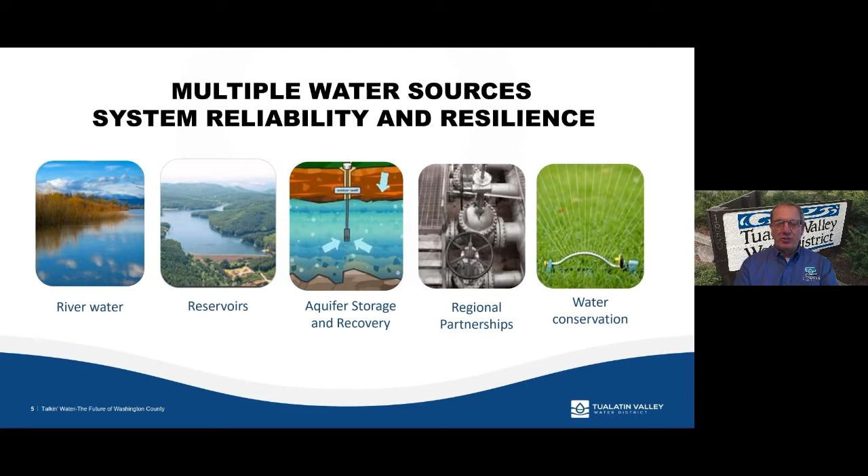So we do have risks that threaten our supply. Earthquakes are actually one of the major reasons why we embarked on the Willamette Water Supply Project. This is going to be seismically resilient as a main source, so that in a Cascadia subduction event, we should be able to continue to provide water after that event occurs. But it still remains a risk, and we make necessary investments to try to mitigate that risk.

Drought, certainly up until a week ago, we were facing some pretty tough situations in terms of drought. We had a tough year and didn't get a lot of rainfall, and we certainly had to stretch our resources to make it through the summer. It's always welcome to get the fall rains here and hopefully see more rainfall in the future to fill those reservoirs back up. But that's something we don't have a lot of control over.

So climate change. We are seeing changes in terms of the precipitation, the amounts we get, and when we get it. That makes it a little more challenging, and certainly is a risk to future supply. So we again are looking to diversify our sources and our portfolio of supply so that we can try to mitigate the risks of climate change.

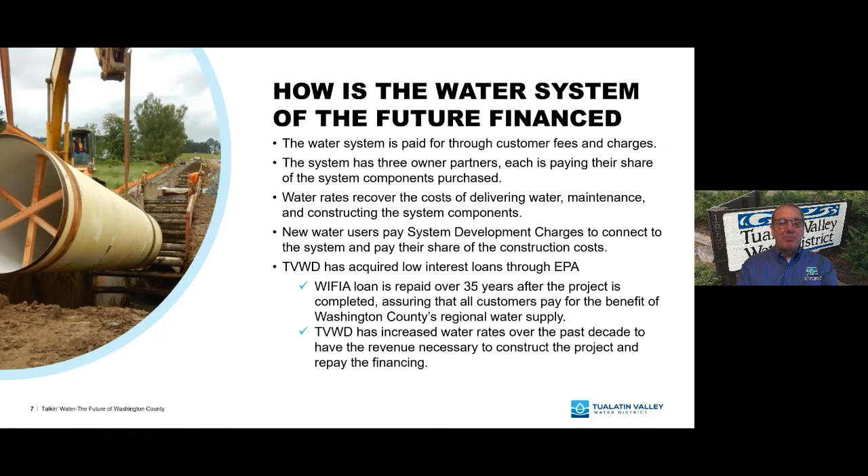So you understand what the costs are, but most importantly, you want to understand, well, what are we doing to manage these costs? The expectation is we manage these costs so that we make sure the impact is as small as it can be to all of you.

We reduced, in this biennium budget that was recently adopted, our personnel services by 2.8%. That may not sound like a lot, but we actually run a fairly lean organization, so that is not something that comes easily. It puts a great deal of workload on fewer people, but we realized we had to do all we could, so we looked at delaying hiring certain positions, or actually not hiring at all for some positions.

We've deferred $50 million of infrastructure projects. This was something we worked with our partners on, a big deal for all of us to make a very tough decision to defer some investment in certain aspects of the Willamette project to make this a little more affordable, spreading those costs out over a longer period of time so that we can reduce the rate impact to all of you.

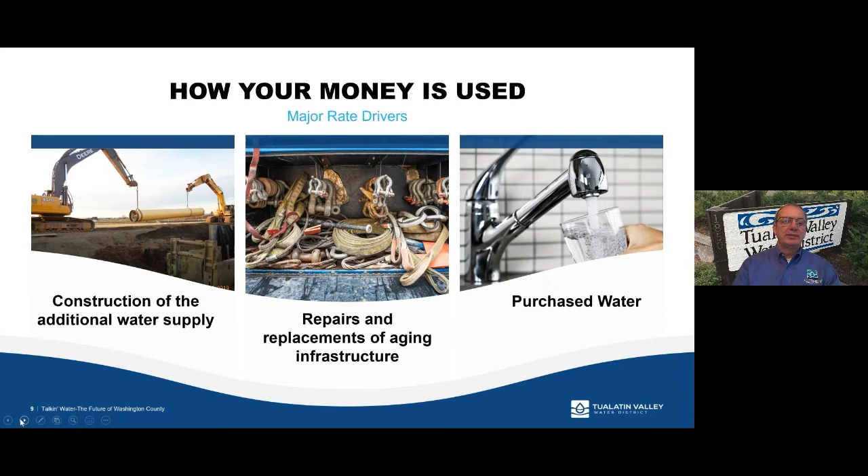Partnerships result in better investments, and one of the partners we work with is even those that aren't necessarily directly involved in this project. We partnered with Wilsonville and the Department of Transportation on the Kinsman Road project to make sure that, regardless of how you're paying for this, we're using your money wisely, which we take very seriously. So where we can partner even with other entities, we basically share the costs on the project in terms of a roadway or those kinds of things.

So we do multiple upgrades with one project. We did this again with Washington County, and we'll be doing it again in the future. We did it on the 124th Avenue partnership, and certainly on the South Hillsboro area pipeline. We coordinated with Newland to try to make sure we were working around what they wanted to achieve, lessening the impact to them and to us at the same time, and again sharing the costs where we can.

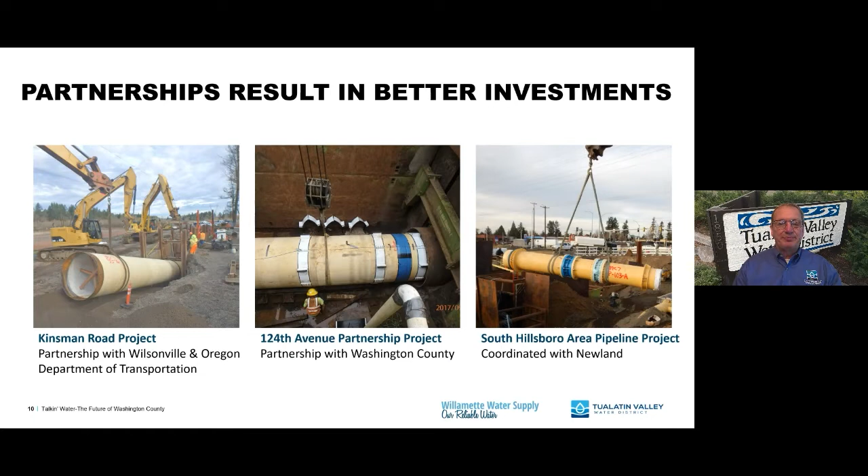So I believe at this point I'm turning this over to, or I will be turning it over to Dave. I'm not sure if I do that at this point.

Next slide. All right, yes, that's the one I was looking for.

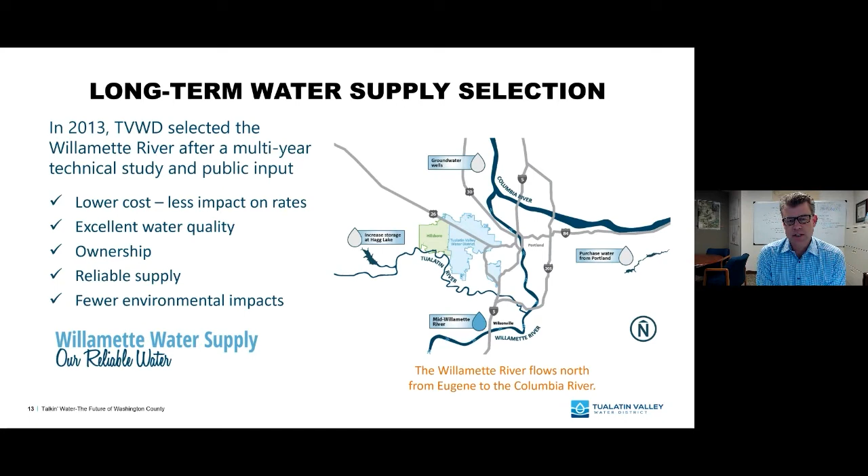And as Tom presented, there are 3 partners in this project: the Tualatin Valley Water District, City of Hillsboro, and City of Beaverton. So next slide is about what is the Willamette Water Supply System.

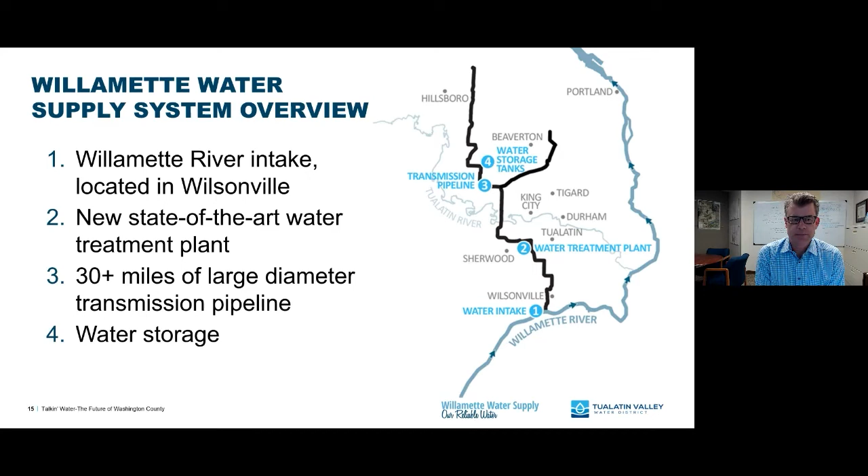So with that broad overview of the overall system, I've got a few slides here to show you, to give you a little bit more of a realistic, tangible perspective on what each of these elements looks like.

First off is the modified expanded intake co-located with the Willamette River Water Treatment Plant. If you go down to Wilsonville and to the water treatment plant park there—not right now, we're doing a lot of construction, but in a little while we'll reopen the park—all the way down toward the Willamette River is the raw water intake that will be shared not only by the Willamette River Water Treatment Plant, but also by our system. So we'll have a single intake supporting both the Willamette River Water Treatment Plant that serves the cities of Wilsonville and Sherwood, and the Willamette Water Supply System that will be providing water ultimately in 2026 to TVWD, Hillsboro, and Beaverton. So that's our intake on the Willamette River.

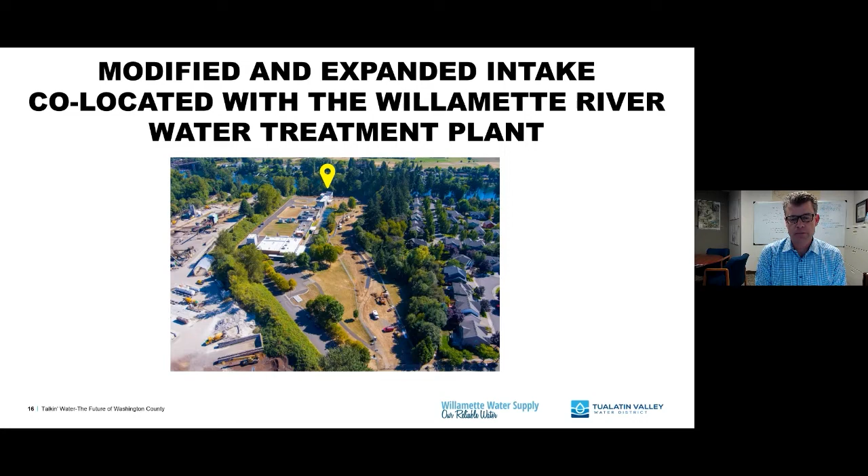Let's go to the next slide.

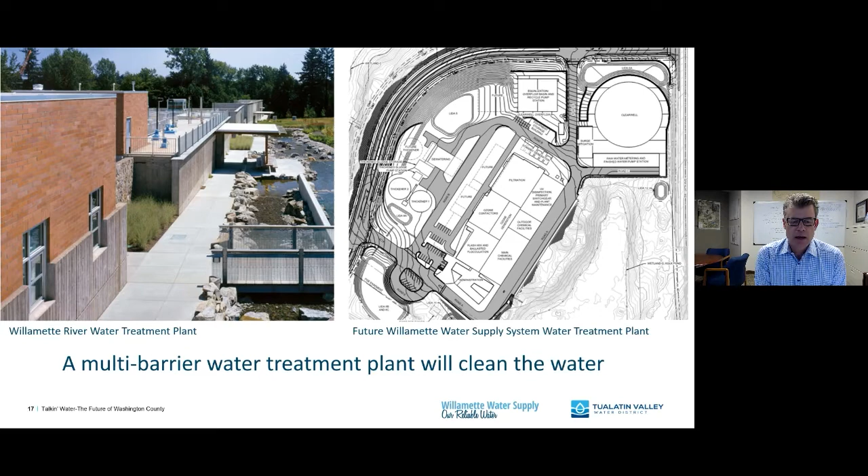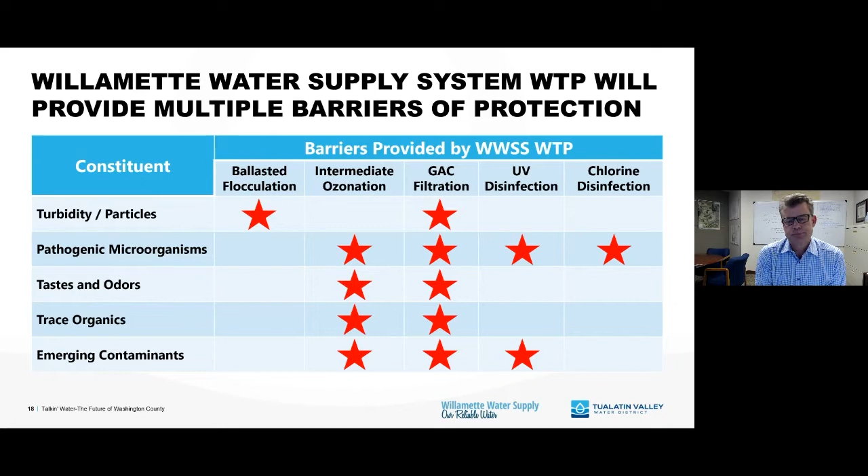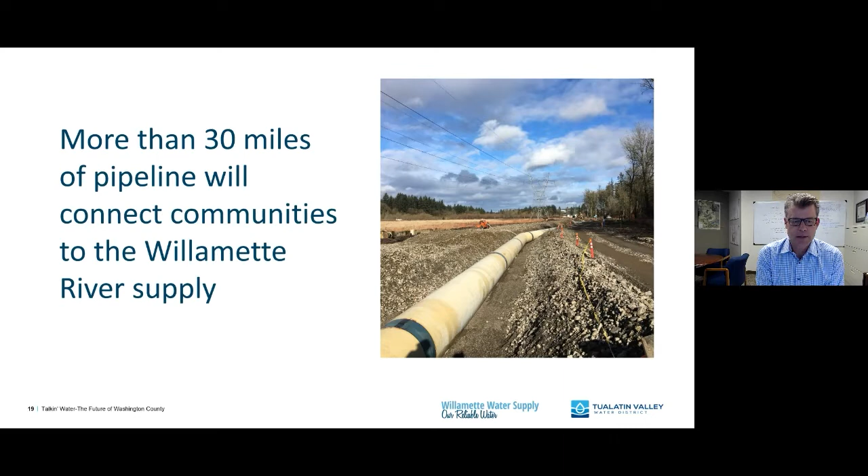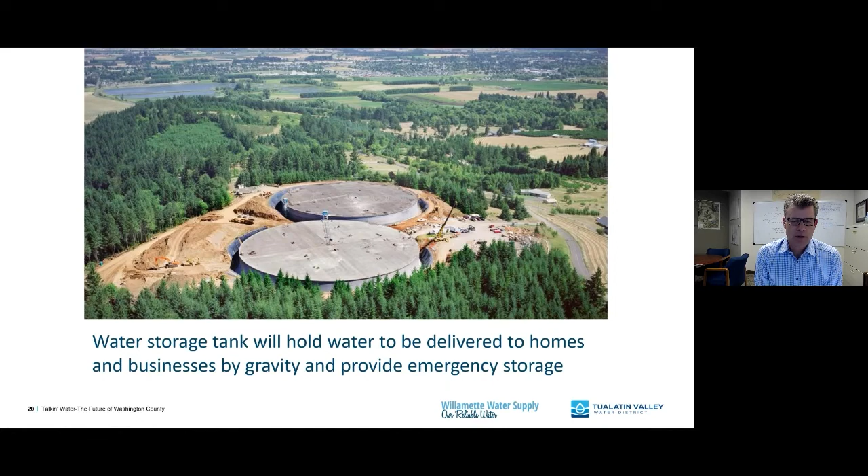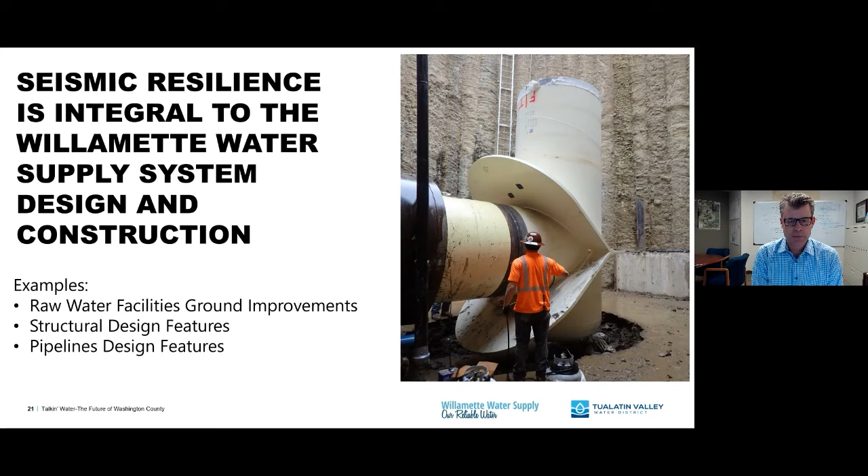Our geotechnical analysis and modeling showed this as a significant risk, particularly during a future Cascadia subduction zone event. It's likely that a lot of the riverbank along the Willamette River will want to move toward the river. If that occurred, it would take our intake with it and we'd be out of water. So we spent quite a bit of time, energy, and money to stiffen and strengthen the riverbank and ensure a reliable intake facility.

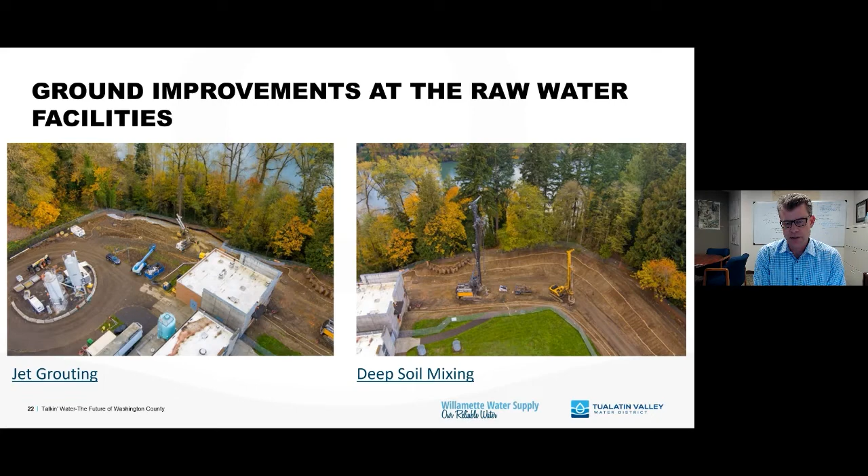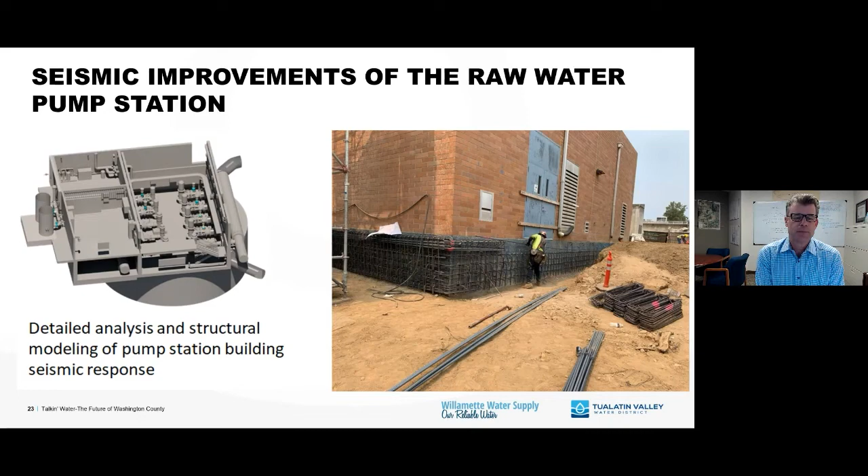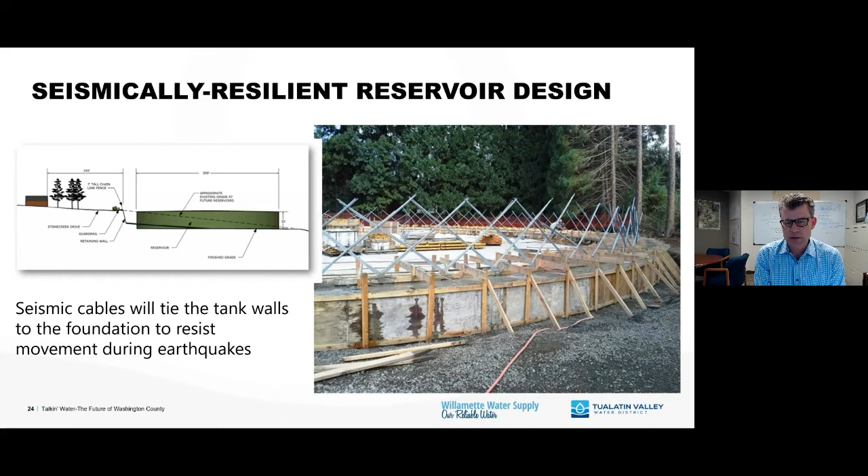Our reservoirs, in the center of our overall transmission system, are critical facilities as well. One design feature of these tanks are seismic cables. As you see them in a crisscross pattern here, these cables anchor the wall down to the foundation so that even during a sloshing event during an earthquake, they don't displace and the tank stays whole.

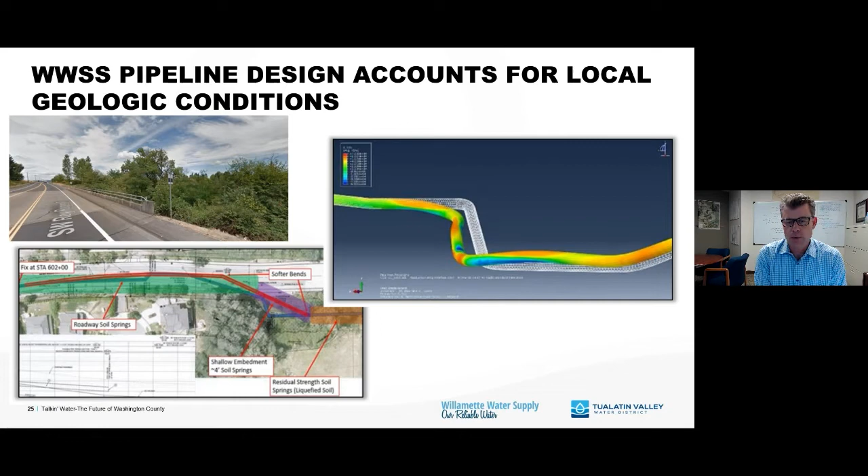We're expecting a lot of land movement there during a major earthquake. Unlike the riverbank at the raw water facility, where we're improving the soil to hold that facility in place, we can't do that everywhere—it would be economically prohibitive. So in some cases, we design our pipeline to accommodate anticipated land movement. It's okay if the pipeline moves, as long as it can hold pressure and remain in operation following such an event. That's what we're showing in this modeling—it gives us the information to ensure the pipeline is strong enough to withstand such an event and continue flowing water afterward.

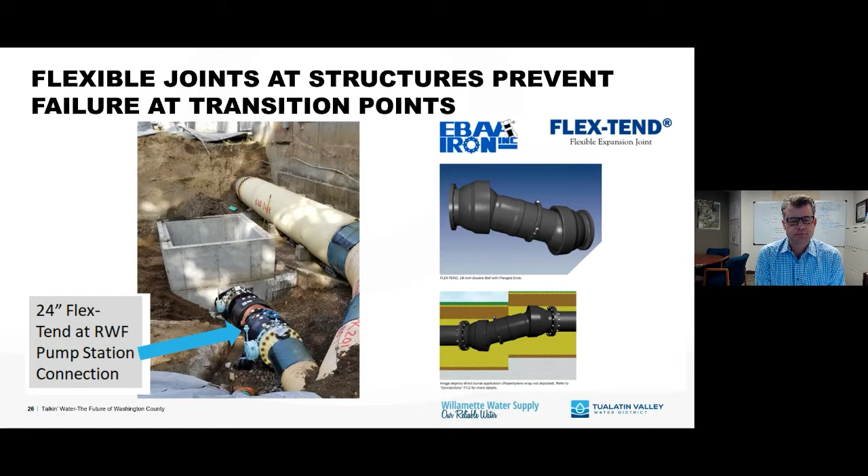Next slide. The program's been in operation for about 6 years now, so this is a very high level version of what we've completed. We've completed 7 pipeline projects. We secured WIFIA loans, we've received our federal permit and approval of our thermal trading plan, and we've continued successful partnerships internally with TVWD, Beaverton, and Hillsboro, as well as many other governmental agencies. We are on track for on-time completion in 2026.

Looking ahead, and actually right now, more than 500 million of construction projects will be sent to bid in the next 6 months. Very busy time for us. I think I've got one more slide.

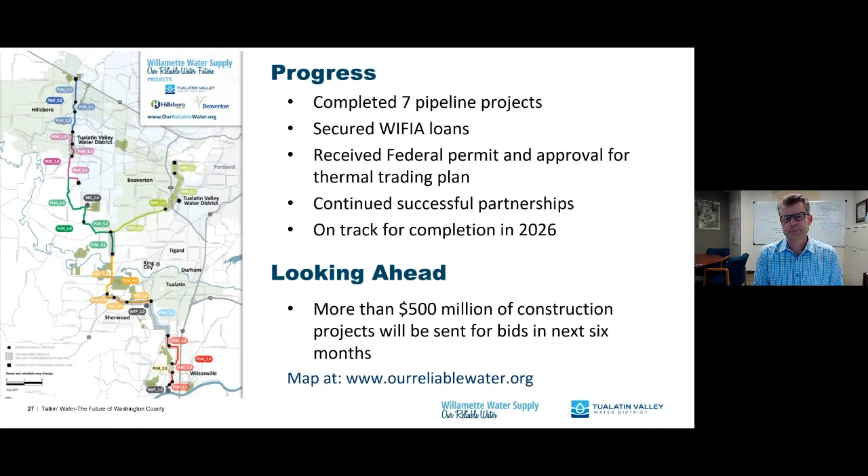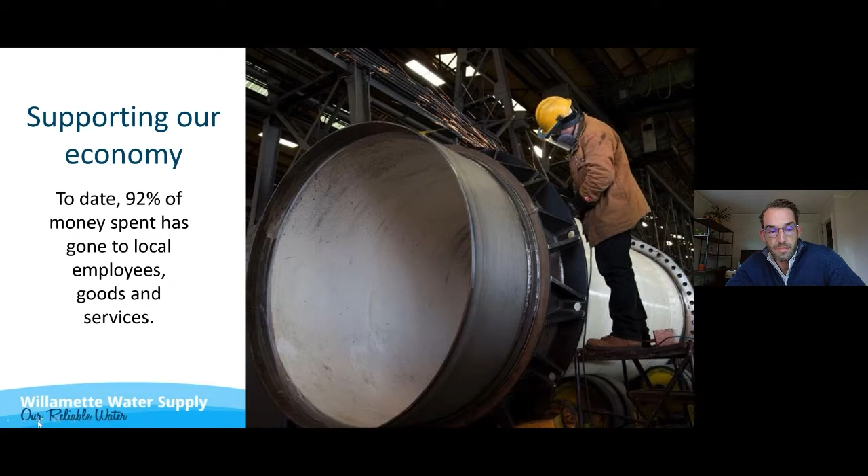Joel? Thanks, Dave. I'm going to advance my slides here. Looks like I might have to do it the old way.

Hi everybody, my name is Joel Kerry. I'm the Water Resource Division Manager for Tualatin Valley Water District. A few things in my role that I'm responsible for and help with a lot of the partnerships that both Dave and Tom mentioned: water quality compliance, regulatory compliance, integration of our new source as Tualatin Valley Water District, and along with the other project partners evaluating that, and other partnership projects, watershed planning, water rights stewardship - so kind of a whole host of things.

So with that, let's dive into a few details, and just a little disclaimer for the last few slides - we'll try and get through these. I know there's a handful of questions that have popped up, but hopefully this can give you a view of what we're doing right now in this arena and also where we're trying to head with some of our water resource initiatives. So just starting with water quality in our region, a lot of efforts that we're actively engaged in right now and looking ahead to our future.

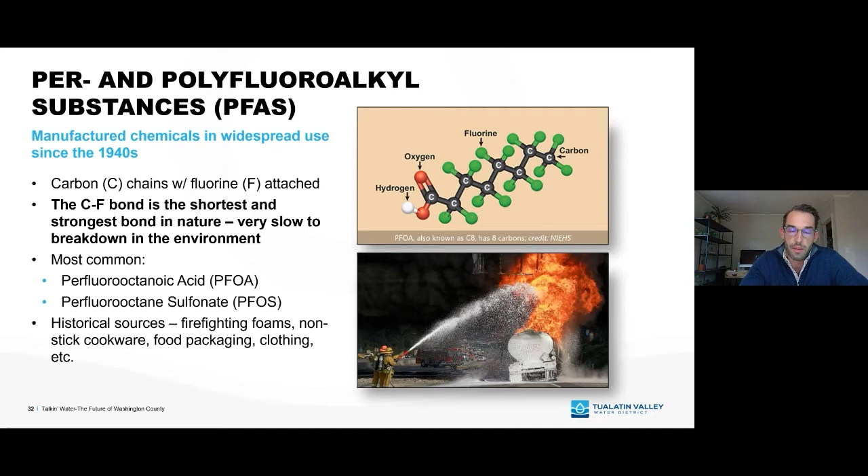So what about PFAS in Oregon? During the 2013 to 2015 sampling period, through a national sampling requirement under the EPA, there were over 2,500 water systems in the state of Oregon that collected samples for PFAS. PFAS were not detected in any of those sources during that period, including the sources we've talked about today, JWC and the Willamette source. Furthermore, the Portland source, which TVWD receives right now as well.

Looking ahead, we are going to be doing the sampling again in 2023 and 2025, notably with much lower detection limits. We've done the sampling before, but knowing we're going to do it again in the future with these lower detection limits, the benefit we get under this national framework is that as a region, we get to do this sampling together for a lot of our sources, so we have additional context about what may be happening.

Occurrence rates in the past under this prior sampling protocol indicated we didn't have any detections, nor the same risk factors associated with it as other parts of the country often see. But that doesn't mean we're not going to keep looking. The benefit of doing this under that regional approach, under that federal framework, is that it helps us really see the context of what's happening in our region, not just individual sources, which can lead to more questions given the nature of these compounds and how prevalent they may be from human-derived sources.

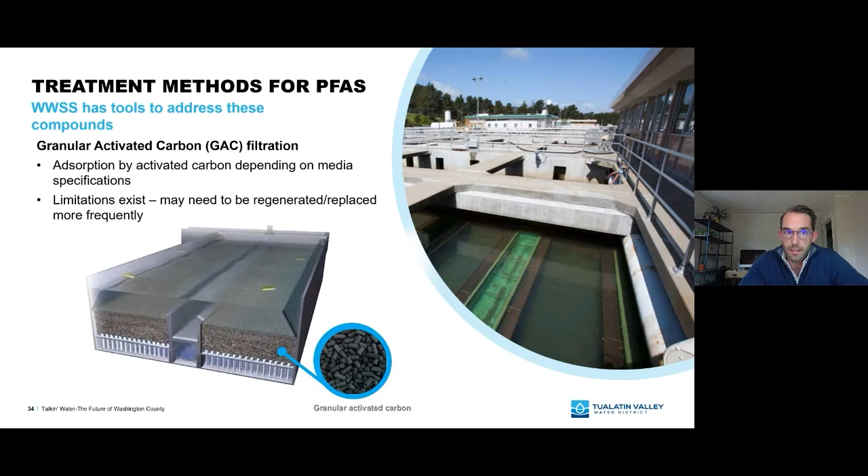Another area of interest that we often see in the news, that our industry and our staff are looking at, we've been tracking it. In fact, there are some conferences coming up in the next two weeks that we'll be attending. It's microplastics.

So there's still a lot of epidemiological work that needs to be done about long-term health impacts. Treatment options that we understand so far are based largely on the current understanding, and as we talked about, particulate size makes a difference in what we're discussing.

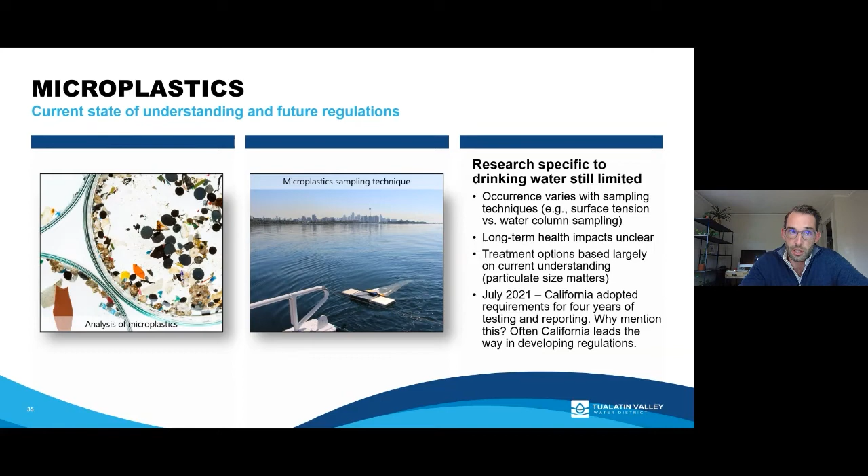So the summary here is we are keeping track of this, we are monitoring it, and we are watching the current state of research to make sure we understand exactly where we need to go.

Just shifting gears a little bit—really trying to talk about how all the elements of our new supply program that Dave mentioned, some of these investments that Tom brought up, what are we doing to protect these investments for the long run?

Well, one of the big ones we're doing is watershed planning activities, and we've started these efforts now to plan for the future. One of the things we just completed this last year, through the Willamette Intake Facilities Commission, was adopting our strategic plan, titled the Mission, Vision, Values, and Goals.

Our staff are going to post a link to that in the chat so you can take a look at it. This is effectively the roadmap for how these agencies together define our regional role in water supply stewardship, watershed planning, etc. And then the other effort on top of that, which just started as a result of finishing that strategic plan, is our watershed protection, monitoring, and outreach plan.

This is a multi-year project based on that strategic plan—the mission, vision, values, goals—which includes several really important elements we wanted to touch on, like prioritizing those risks in our watershed for the mid-Willamette and beyond. This plan is focusing right now on those river miles upstream of our intake, but more broadly, the basin in general.

Just what are those areas of engagement we need to be at? What strategic partnerships do we need to leverage? This is a big basin—we cannot, nor should we, be doing this alone, clearly. So this is really about how we develop these partnerships further across the basin, looking at what we can do and how we can invest those resources effectively.

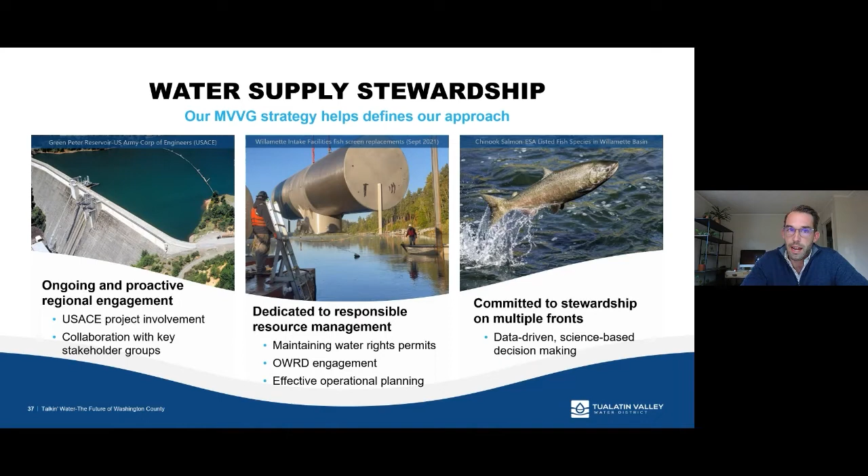Making sure that we do our part to responsibly manage that resource on all fronts. As we talk about often in the world of water rights, we look at multiple aspects of this, not just our own water supply needs, but how do we protect the resources out there, including those other stakeholders - I'll use that term broadly, but that includes our aquatic species. How do we make sure we're addressing all this and using science and data to make the best decisions possible? So a lot of that gets the point across of the things we're actively engaged with and looking at the future of.

Last, but certainly not least, on this particular item is our legislative engagement. This is an area that we've been active in and continue to be active in. This isn't just my role - there's a lot of additional efforts that happen at our partnerships, a lot of additional efforts through staff around these agencies. Our goal is to make sure we provide input to help our region.

To our legislative members, we've been actively involved in things like the Harmful Algal Blooms Work Group, which was convened by the House Committee on Water. We've provided testimony through these affiliations on the 2020 wildfire impacts on the water sector, trying to make sure that, while maybe it doesn't seem as obvious for some regions like Washington County, we do have those impacts with some of our other sources, including Joint Water Commission. And overall, how might that impact the state and our drinking water?

I just want to spend 10 seconds on that one. One particular point we want to make clear is, despite everything, our water supply operations go 24/7. That's really one key element we want to get at with some of our engagement on that issue - we oftentimes don't have the luxury, nor should we. We make sure that our water goes 24/7, despite all the risks that come flying at us. It's an immense point of pride with a lot of our operations and elected officials about how we go about this. So, in that arena, advocating for infrastructure needs, and really trying to make sure we're continuing to advocate for water rights and water resource priorities across the basin.